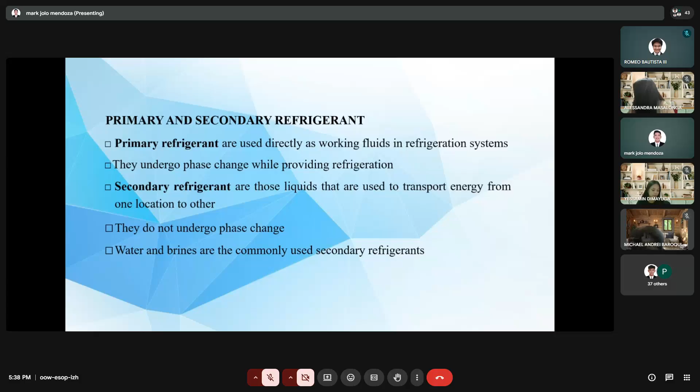If the operating temperatures are above zero, pure water can be used as a secondary refrigerant, for example in large air conditioning systems. Antifreezes or brines are used when refrigeration is required at sub-zero temperatures, like in cold storage. The commonly used secondary refrigerants are solutions of water, ethylene glycol, propylene glycol, and calcium chloride.

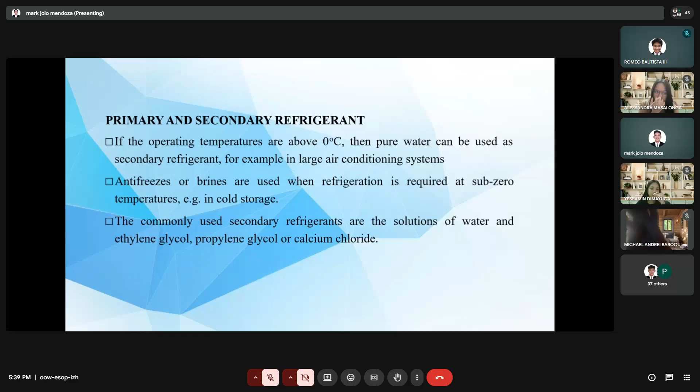We have already tackled some of this. We select refrigerants in your design based on these key requirements. First is the thermodynamic and thermophysical properties, which are the properties we get from tables.

The next is environmental and safety properties. We have to make sure it will not contribute significantly to our carbon footprint. Then third would be economics.

Next, we already know this requirement: suction pressure at a given evaporator temperature. The saturation pressure should always be above atmospheric for prevention of air or moisture ingress into the system and ease of leak detection. Higher suction pressure is better as it leads to smaller compressor displacement. I hope you also notice that our suction pressure at the compressor doesn't go below atmospheric pressure.

This is the reason. And then, discharge pressure at a given condenser temperature should be as small as possible to allow lightweight construction of compressor, condenser, etc. Because when our discharge pressure is high, most likely our compressor will get damaged. And one of the reasons for that is our refrigerant's properties degrade more, which would also cause damage to our condenser once the refrigerant enters the condenser.

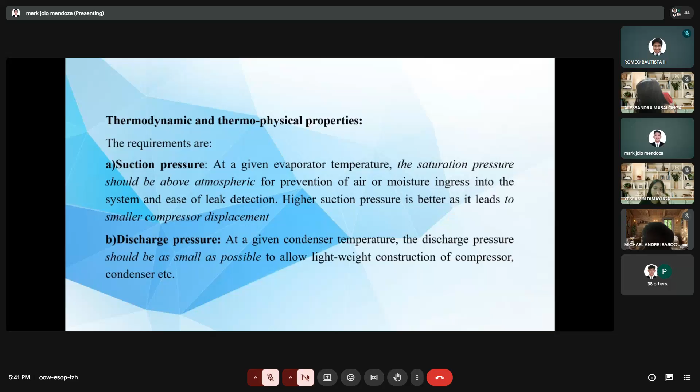And pressure ratio, we'll be utilizing this. This should be as small as possible for high volumetric efficiency. You'll be appreciating this once we discuss our sample problem.

Then latent heat of vaporization needs to be large, should be as large as possible so that the required mass flow rate per unit cooling capacity will be small. Because when our latent heat of vaporization is high, that's the amount of energy to undergo phase change. It needs to be large because, of course, our formula is M times CP, or mass times enthalpy, and that enthalpy is your latent heat of vaporization during phase change. So when that's high, it would only require a smaller amount of flow rate of our refrigerant.

These are somewhat contradictory as the operating pressures, temperatures, and latent heat of vaporization are related by the Clausius-Clapeyron equation. Since the change in entropy of vaporization is relatively small, from this equation, it can be shown that this, we will use this later in our formulas. So take note of these formulas.

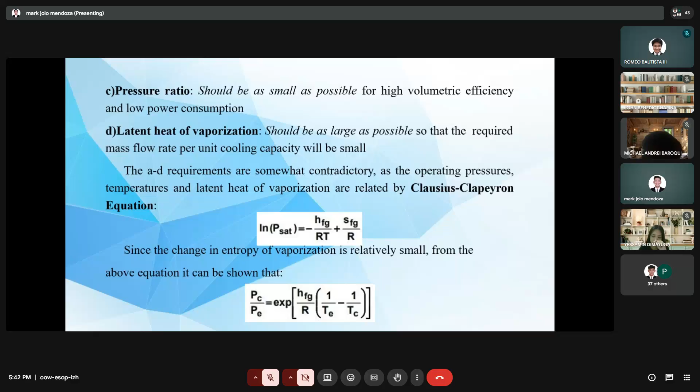An isentropic index of compression should be as small as possible so that the temperature rise during compression would also be small. Liquid specific heat should also be small so that degree of subcooling will be large, leading to smaller amount of flash gas at evaporator inlet. Vapor specific heat should be large so that the degree of superheating will be small. Thermal conductivity in both liquid as well as vapor phase should be high for higher heat transfer coefficients. Viscosity should be small in both liquid and vapor phases for smaller frictional pressure drops.

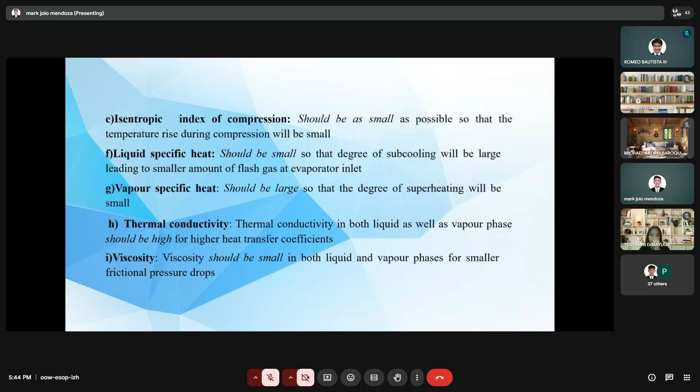You will all appreciate this when we discuss our first topic after midterms, which is more about effects of superheating and subcooling of our system. So this is why we need to consider all of these considerations.

You already know how to look at this. The thermodynamic properties are interrelated, mainly depending on normal boiling point, critical temperature, molecular weight, and structure. The normal boiling point indicates the useful levels as it is directly related to the operating pressures. A high critical temperature yields higher COP due to smaller compressor superheat and smaller flash gas losses. The important properties such as latent heat of vaporization and specific heat depend on the molecular weight and structure of the molecule.

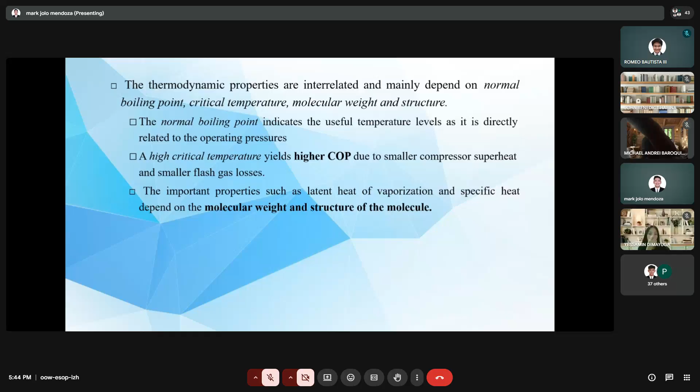Environmental and safety properties. Important environmental and safety properties include ozone depletion potential. Our ODP should be zero, so there should be no chlorine and bromine atoms. We will solve that later - you will determine these atoms when we name refrigerants.

Same as with our GWP or global warming potential. This should have as low a GWP value as possible to minimize the problem of global warming. And total equivalent warming index - refrigerants with as low a value of TEWI as possible are preferable from a global warming point of view.

So when you evaluate your refrigerant in your design, you have to make sure that these are all included in your objectives. Because again, one of our goals in designing today is sustainability. So the system you pick should consider these parameters.

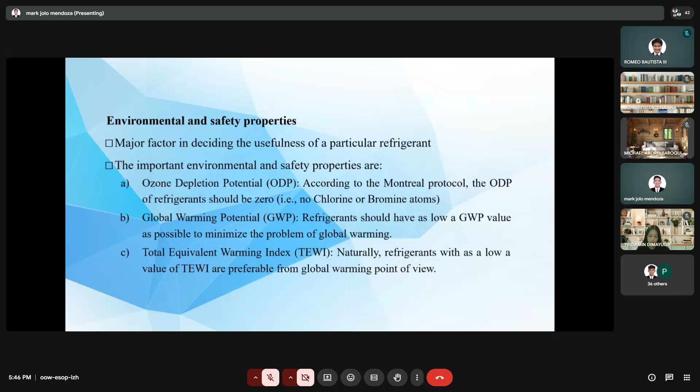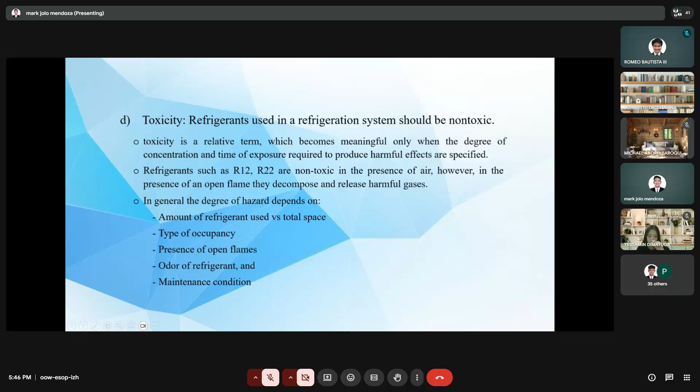And toxicity as well - this should be non-toxic. Refrigerants such as R12, R22 are non-toxic in the presence of air. However, in the presence of an open flame, they decompose and release harmful gases. The degree of hazard depends on the amount of refrigerant used in comparison with the total space, the type of occupancy, presence of open flames, odor, and maintenance condition.

It should also be non-flammable, and if you are using flammable refrigerants, special precautions should be taken to avoid accidents. There are six safety groups defined by ASHRAE: A1 to A3 and B1 to B3, where group A1 is least hazardous, while refrigerants belonging to group B3 are most hazardous.

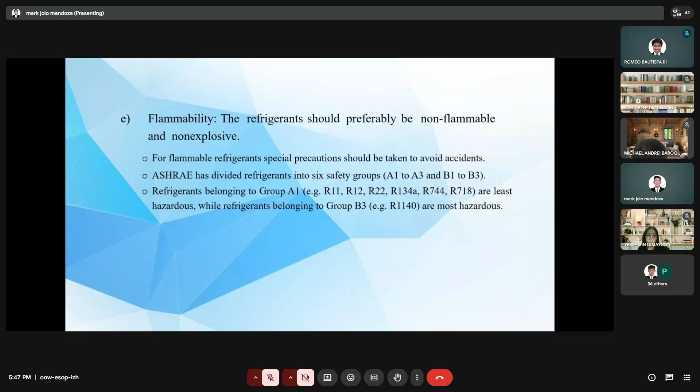Other important properties: chemical stability, compatibility, miscibility with lubricating oils, dielectric strength, ease of leak detection. And other economic properties, such as cost, availability in the market, and also storage and handling.

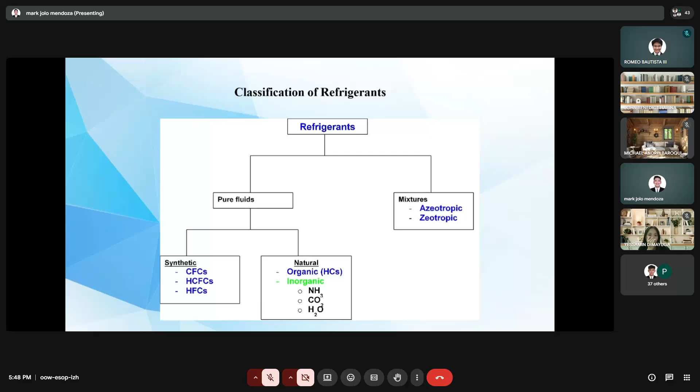So we do have these classifications of refrigerants. We have the pure fluids subdivided into two, synthetic and natural. And the other one is mixtures, which can be azeotropic or zeotropic. Let's dig deeper into this.

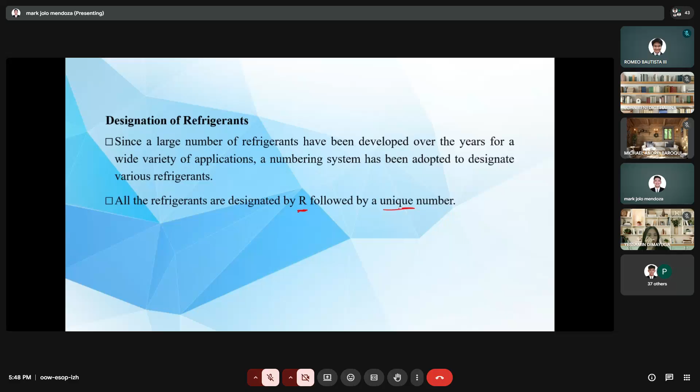Designation or the naming of refrigerants. Since we already have many refrigerants developed over the years, we have adopted a numbering system to designate various refrigerants. All refrigerants are designated by R, followed by a unique number. For fully saturated and halogenated compounds, these are derivatives of alkanes - so this is the general formula for alkanes.

The naming is RXYZ, wherein X plus 1 indicates the number of carbon atoms. Remember that. Y minus 1 is the number of hydrogen atoms. And Z indicates the number of fluorine atoms. Then the balance indicates the number of chlorine atoms. And again, as we mentioned earlier, we should have no chlorine atoms when we talk about environmental properties.

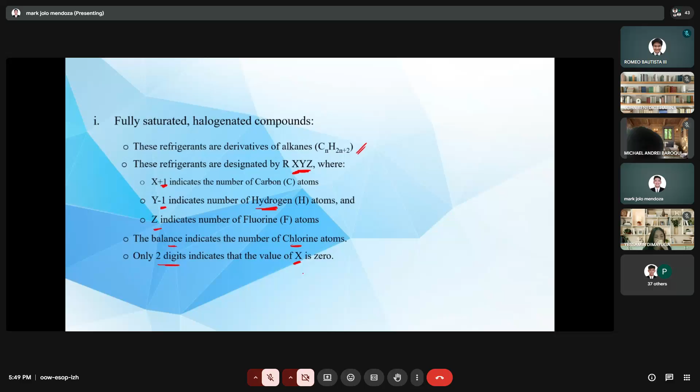Only two digits indicates that the value of X is 0. So that means when the refrigerant name has only two digits, the X there is 0. Remember that - when it's 2 digits only, like R22 or R12, that means your value of X is equal to 0. Let's evaluate this: number of carbon atoms - X is 0.

Since yung formula natin ay we add 1, di ba? So that's 0 plus 1. Meron yung 1 or 0 yung X natin, yung number of atoms. Since kailangan natin itong mga values na to for evaluation, nag-a-add tayo ng 1 kasi yun yung standard naming natin.

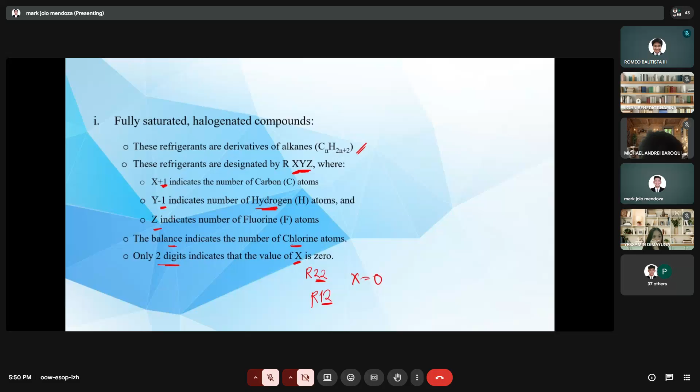But you have to always remember na kapag two digits lang yung refrigerant natin, that's always X equals 0. And yung Y natin is equal to 2, that's your number of hydrogen atoms. So 2 minus 1 equals 1. Kasi dito nagma-minus 1 tayo. Kaya siya may minus 1 dito equals 1. You have to take note of this.

As well as your Z. Your Z is your number of fluorine atoms, 2. Kaya yung ating pangalan ng refrigerant is R22. Kasi yung X ay 0, yung Y ay 2, yung Z ay 2.

Saan natin gagamitin itong value natin na minus 1 natin tsaka ito? That is to balance. Balancing should always be 4 minus this number of atoms, yung H plus F. So 4 minus 1 minus 2, that is your number of chlorine atoms. Kapag nag-balance tayo, that will be the number of chlorine atoms.

Chemical formula natin, if you check the chemical formula, R22, it would be CHClF2. Sa exam, you try to evaluate this kasi most likely sa exam, ito yung ibibigay - itong chemical formula. Chemical formula ang ibibigay and you have to derive the name.

Meron kayong list na table, di ba? May table kayo. Most likely yan lang yung mga refrigerants na lalabas sa exam, kung ano nandiyan sa table. Kahit pa sa uluhin nyo itong mga chemical formulas na yan, pag hindi nyo naman naipakita itong XYZ doon, mali pa rin yun.

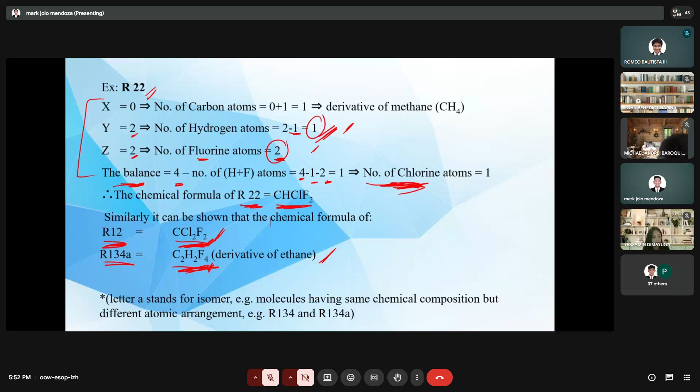Tandaan nyo yon. Then kapag naman inorganic refrigerants, these are designated by number 7, followed by... sorry, these are designated by number 7 followed by the molecular weight of the refrigerant. So kapag nag-name tayo, saglit lang, give me 1 minute.

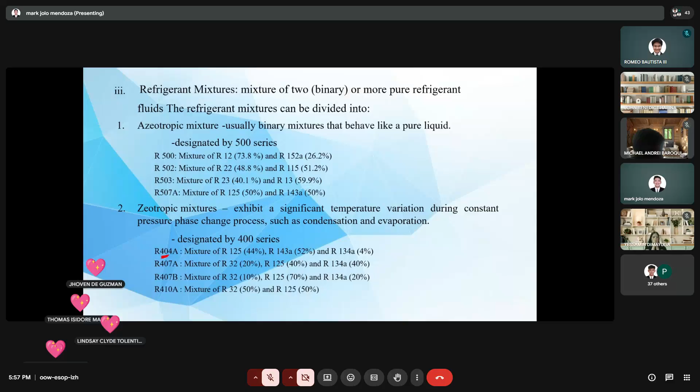And then zeotropic mixtures, this exhibit a significant temperature variation during constant pressure change process such as condensation and evaporation, designated by 400 series. So zeotropic kapag 400 ang ating mga refrigerants. Tandaan nyo lang yan, kasi baka ganyan yung lumabas, tanungin kayo kung anong azeotropic at zeotropic. But guys, di nyo kailangan mag-worry, basta pag may exam na, ang sasabihin ko naman kayo kung anong mga nandun sa kung anong mga need yung aralin. It's just that ngayon fina-finalize pa siya pag bimitingan pa mamaya.

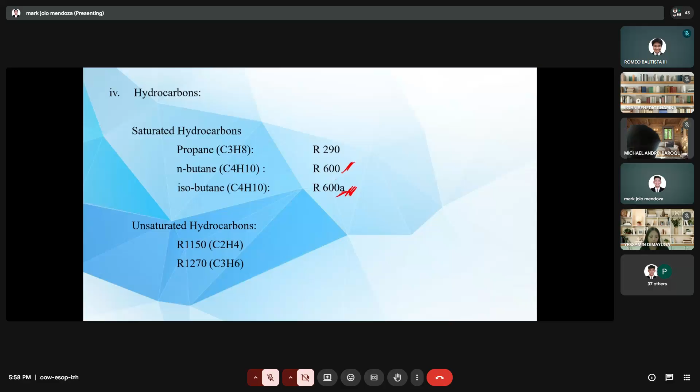Comparison between different refrigerants. Synthetic refrigerants that were commonly used for refrigeration are, gaya ng sabi ko, R11, R12, R22, R502. Yun yung mga kalimitan din.

However, ito nga is phased out na. Yung kalimitan dito, mga phased out na siya. Why? Kasi meron siyang chlorine atoms, kaya fine-phase out yan. So, dapat sa design nyo, you consider this.

Then, the synthetic replacements for the older refrigerants na ginagamit ngayon is yung R134A natin and other blends of hydrofluorocarbons. But generally synthetic refrigerants are non-toxic and non-flammable.

However, compared to the natural refrigerants, the synthetic refrigerants offer lower performance and they also have higher global warming potential. As a result, the synthetic refrigerants face an uncertain future. So, kino-consider lagi natin yung environmental effect, kasi syempre, again, we are all after sustainability.

Then, the oldest and most commonly used natural refrigerant is ammonia. This has good thermodynamic and thermophysical environmental properties. However, it is toxic, not compatible with some of the common materials of construction, such as copper, which somewhat restricts its application. Then other natural refrigerants being suggested are hydrocarbons and carbon dioxide.

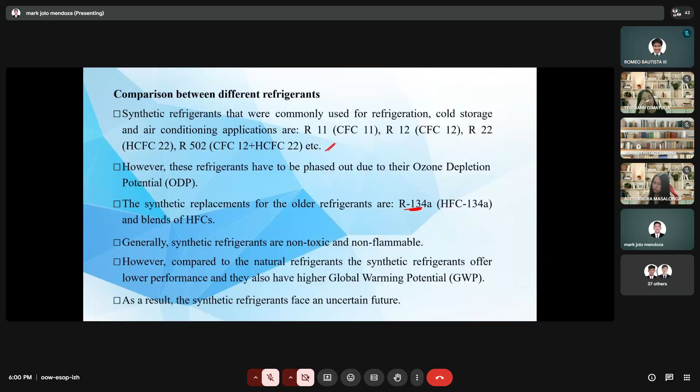So you research: kailangan ko ba ammonia pa rin ang gagamitin ko for optimum design? Alam kong siya ay toxic and hindi compatible sa ibang metals, or should I stick with using synthetic na non-toxic and non-flammable, pero yun nga siya ay nafe-phase out na. So you have to weigh in yung mga environmental aspects natin sa pagpili ng mismong refrigerant nyo sa inyong design.

So pakitandaan nito, guys. This would be the values of K natin sa solution natin. If you can recall, pag nagsosolve tayo ng volumetric efficiencies, gumagamit tayo ng K. So, moving forward, tandaan ito: ang R11, pag gumamit tayo ng R11, your K should be 1.13.

Since ito ay synthetic, meron na ditong mga suggested na pamalit, so i-research nyo ano ba yung maganda dyan. Then sa R12, remember your K is equal to 1.126 - hindi to ibibigay sa exam. Then R22 is 1.166.

R134A is, I'll follow you up with this - tinanong ko to kay ma'am, nakalimutan ko lang siya ilagay dito. Let's skip muna yung R134A. Then R717, we use 1.304. Anong binigay ko sa inyong given dito? 1.304 ang gagamitin natin sa R717. Then R744 is 1.3. Then R718 is 1.33. R600a is 1.086.

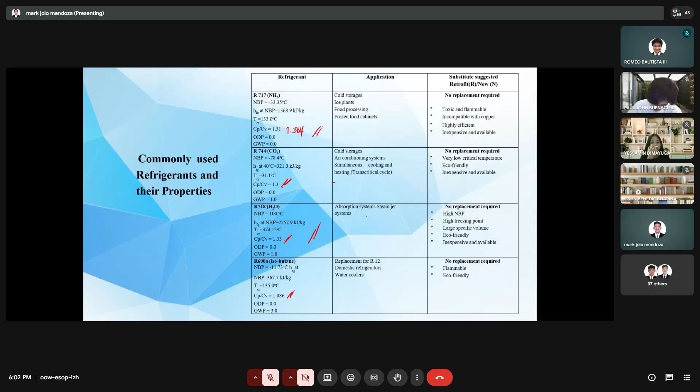Tandaan nyo ito mga values na to. Pero di ba, sinabi ko naman sa inyo, kalimitan lang naman ginagamit is R12, R22, R134A, R717. Pwedeng gamitin din natin ang R718 as well as R744. So, pakitandaan ang mga values na yun kasi gagamitin natin tong bagong formula na mas exact.

So, refrigerant mixtures offer the advantage of tailoring the composition to suit various temperature requirements. It is also possible to control properties such as toxicity, flammability, oil miscibility by manipulating the composition. Hence, they are finding greater use. However, since the composition of zeotropic mixtures change due to leakage, use of these substances requires greater care. And the design of equipment using these refrigerant mixtures is also more complex.

That's it for the refrigerants. So bakit ba natin again diniscuss yun? Kasi, una, need nyo yun sa design, kailangan nyo mag-evaluate ng gagamitin nyo. And pangalawa, is that we are going to utilize this new equation. I believe kayo ay familiar dito.

Kasi, alam ko, dapat nadaanan nyo tong equation na to sa inyong combustion. So ano ba yung tinutukoy ko? Let's have this, saglit. Maghanap lang ako ng given na may paggagamitan nun. Hinahanap ko lang pala guys yung sa R134. Ayun, 12. Ammonia. Wala, ipapaliwanag ko sa inyo yung value ng R134A, kailangan ko lang siyang halukwatin.

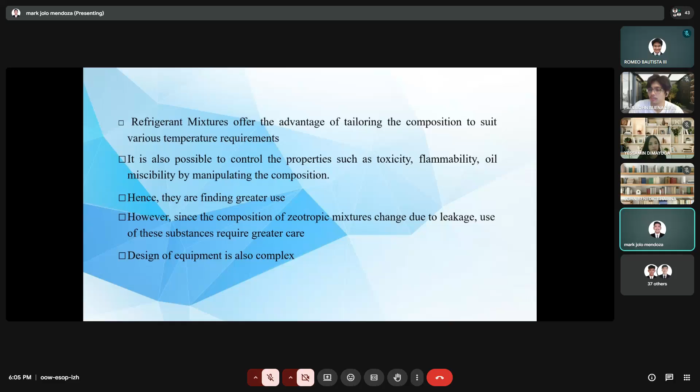Yan, so ano yung sinasabi kong formula? Kung maaalala ninyo, kung evaluate natin ang system, yung state point 1 natin, lagi this is at saturated vapor. Then papatak tayo, pupunta tayo ng state point 2, nag-evaluate tayo na superheated vapor. Then gumagamit tayo ng P2 at S2 na equal sa S1. Then titingin tayo sa Mollier.

When we work with R134A, we interpolate because we have values from the R134A table. That's still going to be the process when R134A is our value, because we have a table for that - the superheated vapor table. So that process is what we'll still use.

But for other refrigerants that don't have a table for superheated vapor, we are going to evaluate the compressor. So, right? Our process 1 to 2 is in the compressor. This is where it occurs.

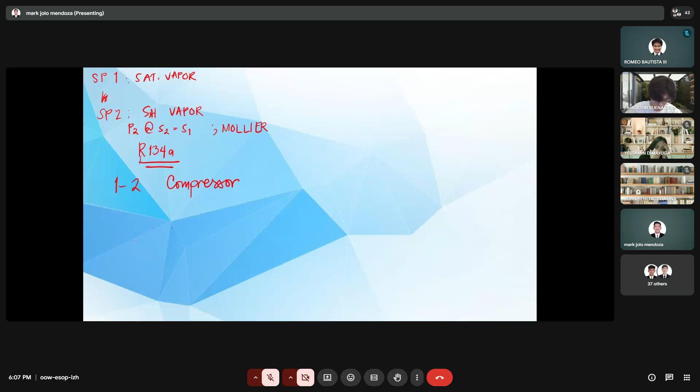Let's say this is the compressor, sorry. This is the compressor. Let's say this is our compressor.

Then, right? Our H1, when we do energy balance, this is your H1. Then this is your H2. Then since, right, we said in the compressor, we require power input to drive the compressor. For the compressor to work, we need power input. So that means we also have a need for input work of the compressor, your WC.

So doing energy balance, we could say that our H2 is equal to H1 plus WC. That's it. So from this, we can get H2, since we have H1. How about WC? How do we get that?

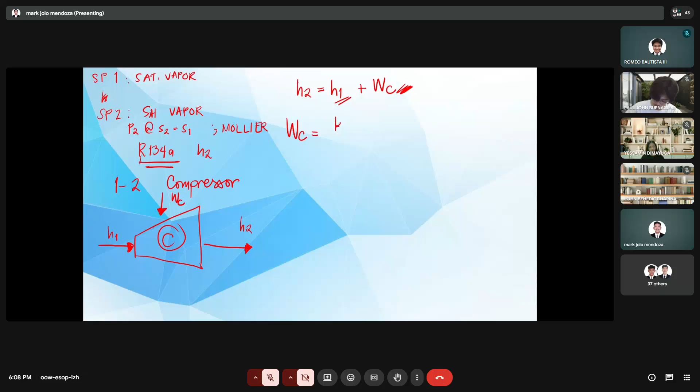That is through our formula: WC equals K over K minus 1, times P1 V1, times the quantity of P2 over P1 to the power of K minus 1 over K. I hope you are familiar with this equation because you used it in evaluating compressors in combustion engines, right? So we'll be utilizing this.

This is simplified because if you refer to the books, this should be K over K minus 1, times PE VS, times P C over P E to the power K minus 1 over K. We made it in terms of numbers because what is this evaporator pressure? That's your P4, equal to P1. Then this is your suction pressure, suction volume, that's your V1. Then PC, your condenser, that's your P2. Then PE, evaporator, that's your P1.

So from this, we don't need to use the Mollier diagram anymore - we can get H2 directly. So when asked what is the compressor work, you can just use this formula, WC equals that. Then when you need compressor power, just multiply by the mass of refrigerant, your WC. So remember that.

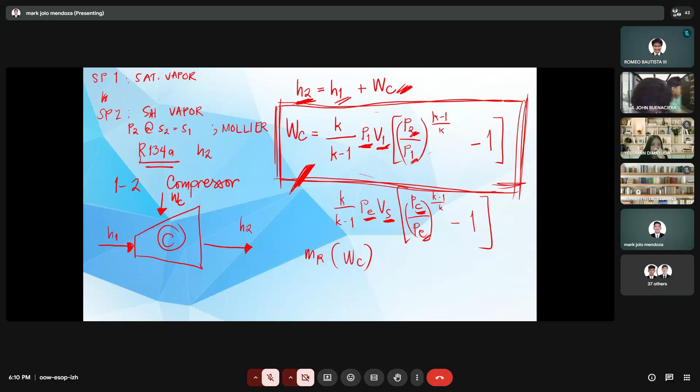So let's try solving this problem. Let's change this, since it's ammonia again, and you know its K is 1.304. Let's have this in R22 instead. Let's use R22.

A commercial plant uses an R22 refrigeration system operating on a simple saturated cycle with an evaporator pressure corresponding to negative 20 degrees Celsius.

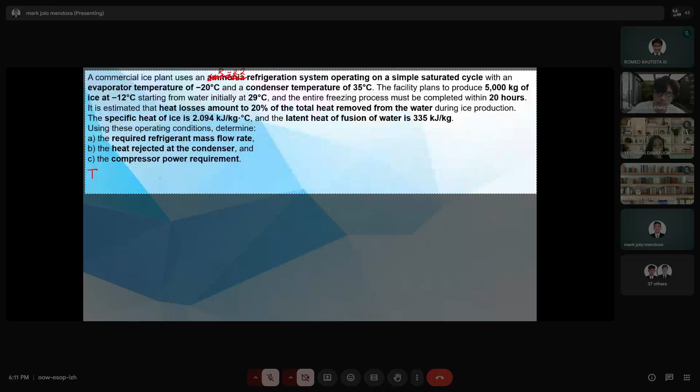Evaporator temperature, that is your T1, and our temperature is negative 20 degrees Celsius, and the condenser temperature of 35 degrees Celsius, that is your T3, at 35 degrees Celsius. The facility plans to produce 5,000 kilograms of ice.

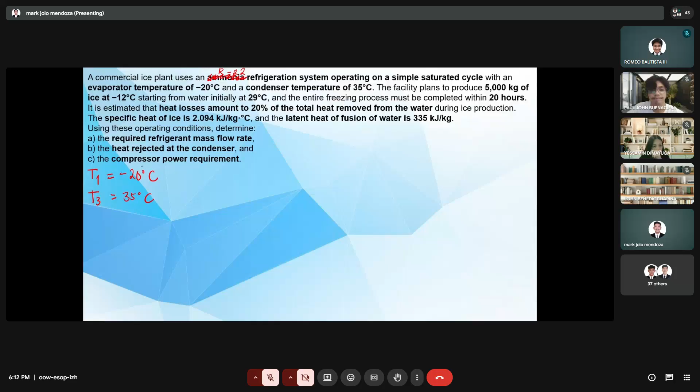So that is our 5,000 kilograms, our mass of ice. That's not the work, right?

At negative 12 degrees Celsius, starting from water initially at 29 degrees Celsius. So from this analysis, you have to understand that this would be your mass - mass of what, guys? Based on this statement, plans to produce 5,000 kilograms of ice at negative 12 degrees Celsius, starting from water at 29 degrees Celsius.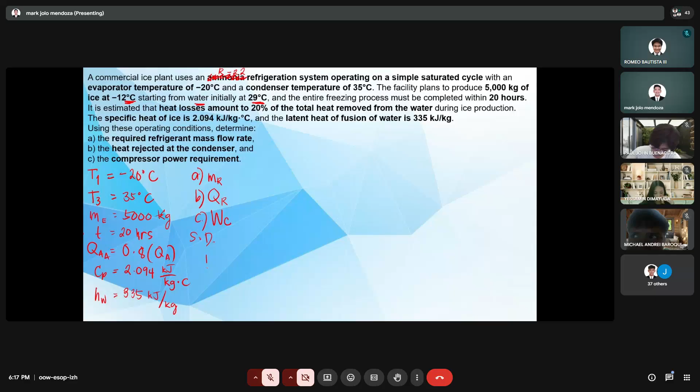How can we get H? 1, 2, 3, 4. How do we get that? We don't have pressure. We don't have pressure. So what will we do? First step, at state point 1...

Since we know that this is superheated vapor, you need - sorry, this is at saturated vapor. Saturated vapor. You need to get your P1 at TSAT. What is your TSAT? That's your T1 at negative 20 degrees Celsius. So therefore you get...

Interpolation. So this is your T, this is your P. You interpolate. What values were given there? Is there an exact value for R22? Give me the value, is that an exact value in the table for R22? Yes, at negative 20 degrees Celsius? Please type the answer.

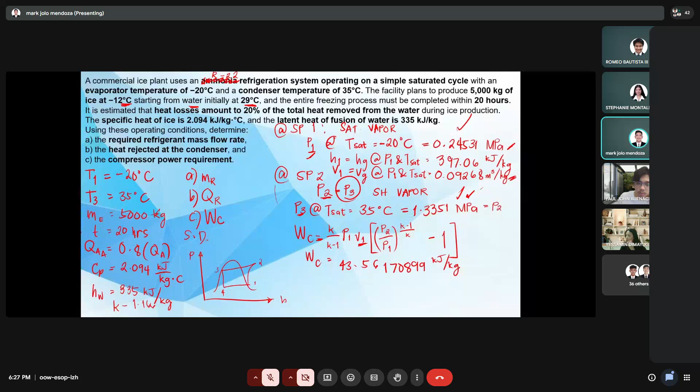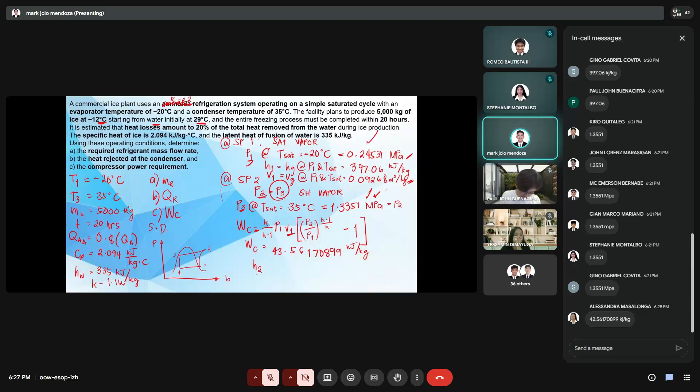I-solve nyo siya, i-substitute nyo. Again, binigay yung value natin ng R22, yung K equal to 1.16, di ba? Doon sa table kanina, you will just substitute there yung values ng your next P1, natin your V1, as well as your solve P2 for your H2 P2. Ninyo, again, ang gagamitin dapat is 1.3351 and you have to obtain the value.

Dapat 43 yung lalabas and walang nakakuha ng sagot. Bakit hindi siya nasagutan? H2 would be 440.621709 kilojoule per kilogram.

Then yung H2 nakuha natin yan, that's just your H1 plus your work ng compressor. Dapat next, solve nyo for yan. You take note of state this point 3.

At state point 3, your H3 at HF, at ito, HF, 35 degrees Celsius at 35 degrees Celsius.

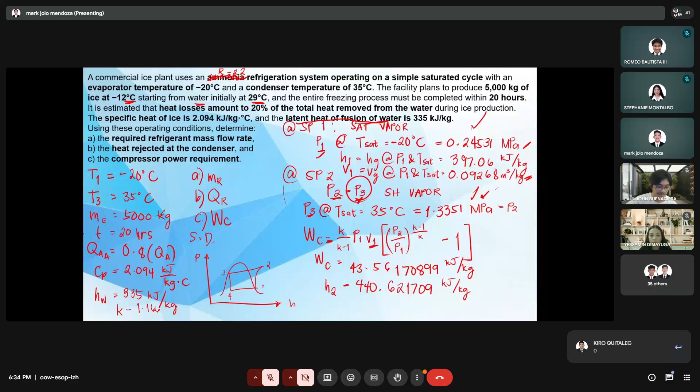So ibig sabihin kung ang tubig natin nag-start at 29 degrees Celsius, so yung delta T natin will be 29 minus 0, kasi ito tandaan ito ay liquid pa. Liquid state pa 'to, tandaan, liquid state pa yan.

So therefore, kaya siya ang i-evaluate muna natin na temperature change ay sa liquid state. Then mag-a-undergo siya ng phase change. That will be the time na i-a-add mo yung latent heat of fusion. So that would be 1 kilogram pa din. Para mas madali guys, sa 1 kilogram muna tayo mag-evaluate.

1 kilogram times your latent heat of fusion. Your latent heat of fusion is 335 kilojoule per kilogram. And then plus, since nag-undergo siya ng phase change, ito yon liquid. Tapos ang sunod na in-evaluate nyo, in-add nyo ang phase change. Nagkameron ng phase change.

Sunod nyo na ngayong i-evaluate ay, since nag-undergo na ng phase change, ay yung change in temperature sa yelo. Therefore, ito naman ay magiging 1 kilogram times your CP ng ice, binigay ang CP ng ice, that's 2.094 kilojoule per kilogram Kelvin. Delta T. So nasa na ngayon yung yelo, di ba? Nag-undergo na nga ng phase change. So this would be 0.

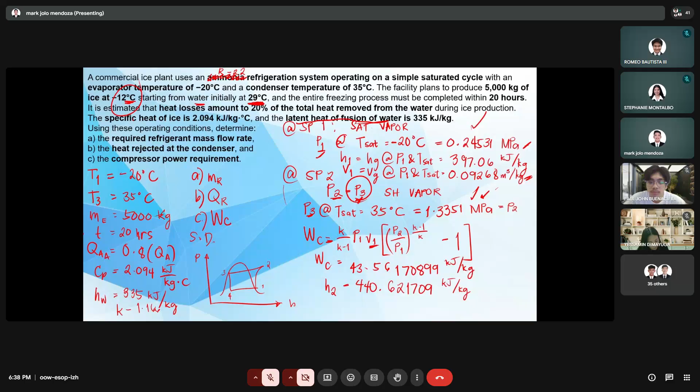At saka sinabi natin dito na it is estimated that heat losses amount to 20% of the total heat removed from the water. Tandaan, meron daw heat losses na amounting to 20% of the total heat removed from the water.

So ito yan, yung ibig sabihin yung ating heat added is na actual is 0.8 ng heat added ng yung heat added sa system natin. So paano natin siya ilalagay dito? Paano natin siya ihalin tulad dito? Since ito yung total heat removed natin from the water, dito natin i-add yung 20% pa. So this would be, ita-times mo to ng 1.20.

Maintindihan guys, isa pa. Kasi itong ating actual heat absorbed natin is just amounting to total heat added, di ba? Eh since may losses pa nga daw doon sa total o doon sa actual, this would be i-add natin 1.2. Gawin na lang natin tong 1.2 para hindi kayo malito. Kasi di ba, ito heat remove, yung ating QA, yung original nating QA, yung i-a-add natin sa system, that is our heat remove, di ba?

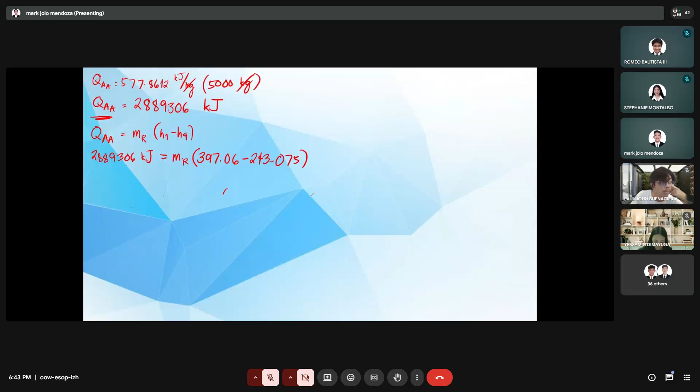Mass ng refrigerant, H1 minus H4. You substitute: 2889306 kilojoule equals mass ng refrigerant. Ang H1 natin is 397.06 minus H4 na 243.075. So ano ang mass ng refrigerant natin?

Guys, may mali tayo. Nakita ko na yung mali natin. Balik tayo dito. Kasi sinabi nga pala sa given natin na must be completed within 20 hours. Ito, may time nga pala tayo dito, guys.

Sa pagkuha ng heat added, hindi pa pala ito naka-kilowatts. Guys, hindi ito naka-kilowatts. Kailangan naka-kilowatts to, para makuha natin yung kilogram per second.

Ulitin natin. Kailangan naka-kilowatts yung sagot natin, di ba? So ito ay 5,000 kilogram na meron tayong binigay na time na 20 hours. Di ba kailangan natin i-kilojoule per second. So ito ay 1 over 20 hours para siya ay maging kilojoule per hour. 1 hour, 3,600 seconds.

Na-overlook natin yon. So that's 40.12925 kilowatts. Ngayon, ito ngayon yung ating gagamitin dito, 40.12925 kilojoule per second para makuha natin yung mass ng refrigerant.

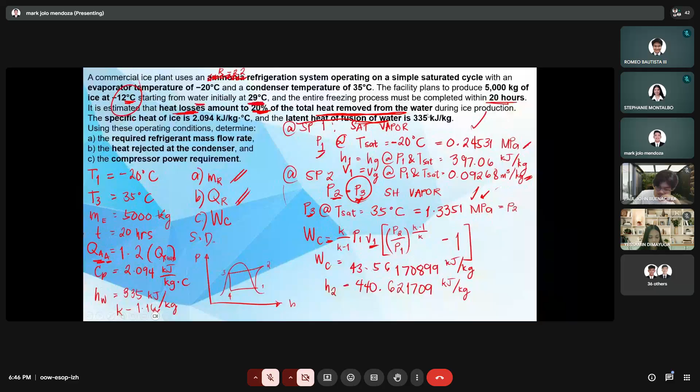440.621709. Tama ba? Mali, 621709. Minus H3 is 243.075.

243, sorry, 243. So ating QR is equal to 51.4816 kilowatts.

Then your work ng compressor, since na-solve natin yan kanina, gawin natin itong power, gawin natin itong P, power, so that's mass ng refrigerant times your work ng compressor na na-solve natin kanina. So you multiply yung mass ng refrigerant, then work ng compressor ay ito, yung 43.5617.

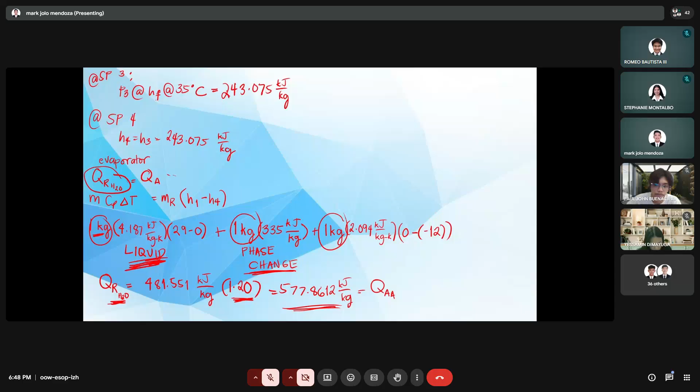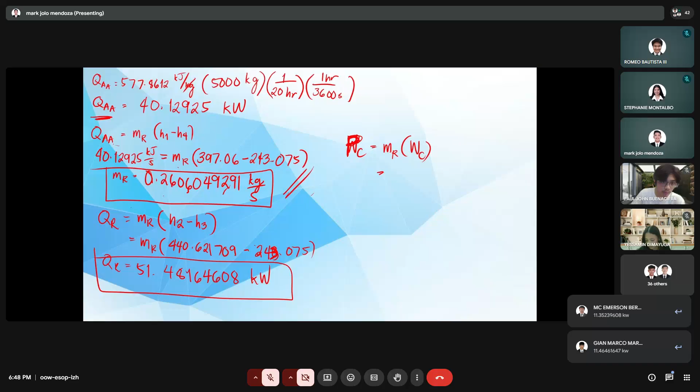Anong work ng compressor natin? That would be equal to 11.35239608 kilowatts. So this is your work na compressor in terms of kilowatts.

How are you going to verify kung tama ang inyong sagot sa work ng compressor? You can also use work ng compressor is equal to your Q rejected minus your QA, kasi this is your work net din. So pag pinag-minus mo itong QR tsaka itong iyong actual QA, this should also arrive at this 11.35.

That is how you solve without using Mollier diagram. Ganyan tayo magso-solve ng ating system. Guys, sino may tanong? Again, ganyan yung hindi siya yung tama, but that's the exact way of solving your state point 2 concerns.

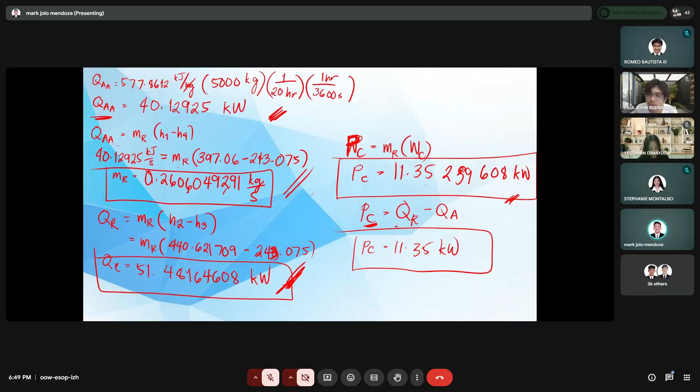Clarification. Saglit, kapag nagsosolve tayo ng enthalpy at state point 2, we get the work na compressor using that formula. And yon, gaya ng sabi ko kanina, you resolve all of those kasi yung P2 na ginamit sa calculation doon is mali. Dapat is 1.3551, not 1.3351. So you resolve that, i-resolve nyo siya after.

Kasi I tell you guys, nasolve na natin lahat ng problem na nasa book. So most likely, alam nyo na kung anong lalabas na nasa exam kasi yun, na-discuss na natin lahat. O pag hindi nyo pa rin siya masolve at hindi nyo inaral lahat ng binigay kong sample problems, wala na, hindi nyo din masasagutan yung exam. Kasi kapareho lang noon, kapareho lang ng ating mga pinagdi-discuss. So make sure na isosolve nyo, i-resolve nyo yan to get the correct values for this.

But the solution-wise, tama yung process natin. Tama yung kung paano natin siya sinolve. Tama lahat ng steps na yon. Mali lang yung value natin sa simula. Sino yung may concern?

Nag-raise ng hand. Okay na po sir, natanong ko lang po sana yung sa P2. Okay, nakuha ko na po yung work ng compressor po, 43.99.

Dapat yung mapapalabas doon, yung H2 na dapat nalalabas doon is 441.0524319. Paki-take note. Kasi na-resolve na namin yun ng previous section. So doon kayo magsisimula ng correct values, yung H2. Yung H2 lang yung mali doon at yung work ng compressor, at yung pressure, syempre, kasi state point 2 tayo nagkamali.